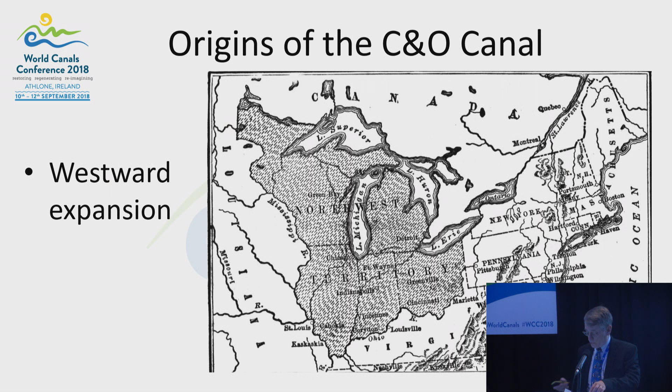Competition between cities didn't start with professional football. Cities along the eastern seaboard—New York, Philadelphia, Baltimore, and Washington—wondered how they could capture the commerce from these newly settled areas. Without connections to the eastern seaboard, commerce would flow from these Northwest territories down the Ohio River and the Mississippi River to New Orleans, or it would flow up the Great Lakes to the St. Lawrence River and Canada.

Philadelphia and Baltimore planned to use railroads to connect to the west. Since this isn't a railway conference, we won't talk much about them for now. But Washington, D.C. decided to use the Potomac River Valley as its route west. The route of the Potomac penetrated fairly deep into the mountains, but much of it wasn't navigable. Hence, the Chesapeake and Ohio Canal was born.

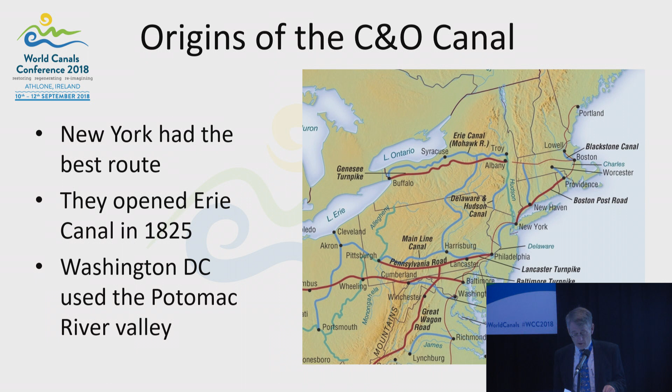On July 4th, 1828, President John Quincy Adams turned the first shovel of dirt for the canal. They planned on building 75 locks, 8 dams, 11 aqueducts, and 1 tunnel en route to Cumberland. Appropriately enough, given the location of our conference today, the majority of the laborers on the canal were Irish immigrants armed with shovels.

When work started on the Paw Paw Tunnel in June 1836, engineers estimated the work would take just 2 years and cost $33,000. Instead, the tunnel took 14 years to complete and cost more than $600,000. The canal finally opened to Cumberland in 1850.

The competing railroad from Baltimore got there 8 years earlier. The canal company was financially exhausted. They never built the last 240 kilometers to Pittsburgh.

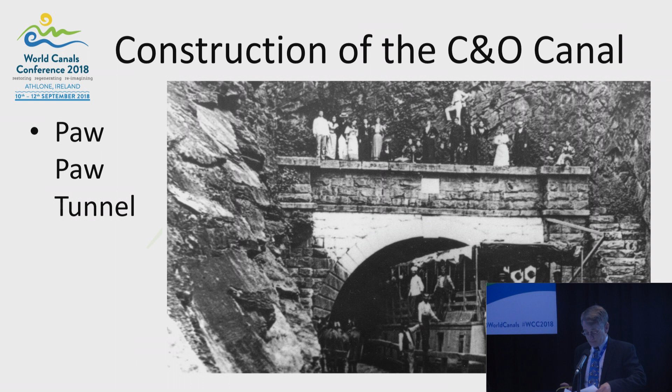The builders of the C&O Canal intended to carry a variety of cargo, just as the Erie Canal did. But they never reached the Ohio River. By 1850, the railroad had proved itself superior in hauling passenger traffic and most freight.

But the discovery of coal fields around Cumberland saved the canal. The canal could compete with the railroad in hauling coal between Cumberland and Washington, D.C. Over 90% of the canal's revenues came from hauling coal. The steamships of the United States Navy were one of the customers for that coal.

That brings us to Williamsport. The two endpoints of the canal, Cumberland and Washington, D.C., were the most important points. But Williamsport was clearly the third most important point.

There's a great valley in the Appalachian Mountains that runs north-south. Williamsport was a crossroads where the canal intersected with that north-south route. South of Williamsport, the valley is known as the Shenandoah Valley, which you may have heard of.

Williamsport was a destination for some of the coal leaving Cumberland, so this town of about 1,500 people had a brisk coal trade because of the canal.

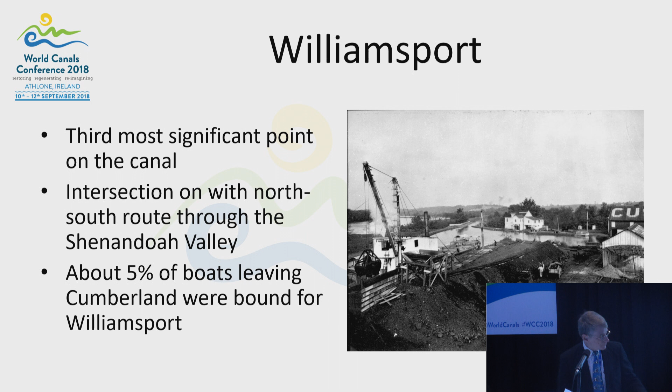Williamsport lies next to the Conococheague Creek. The canal crossed that creek on an aqueduct that was 64 meters long.

The aqueduct is famous for an accident in 1920. A boat, Canal Towage Company number 73, was empty, headed upstream. Captain Frank Myers was the only person on board. The captain's stepson was leading their three mules on the towpath.

When the stern of the boat crossed onto the aqueduct, the upstream wall began to collapse. Captain Myers saw the movement in the wall and realized what was going to happen. He called out to his stepson to release the mules.

The captain jumped from the boat onto the adjacent berm abutment. Then, as the breach developed, the escaping water carried the boat out of the aqueduct into the creek below.

They repaired the aqueduct in 12 days, building a wooden trunk that they used until the canal closed in 1924.

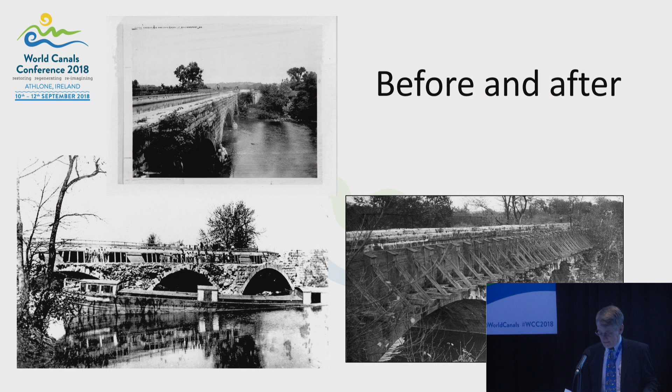Even in 1920, people liked checking out the scene of an accident, as they do today.

The canal always competed with the Baltimore and Ohio Railroad, which ran on the other side of the Potomac River to Cumberland. The canal always suffered from flooding.

Over the life of the canal, 42 significant floods hit the canal. Most floods only damaged small sections.

One devastating flood occurred in May 1889. The flood forced the canal company into bankruptcy. That would have been the end of operations, but the competing Baltimore and Ohio Railroad emerged as the majority bondholder for the canal.

That railroad wanted to avoid a bankruptcy sale that would allow a competing railroad to buy the canal right of way. So they authorized the repairs to be made. Operations didn't resume until 1891, a year and a half later.

Another major flood occurred in March 1924. This one did spell the end of operations. The railroad decided it wasn't worth the investment to make the repairs required. Operations ceased, and the canal fell into disrepair.

So, those of us listening to the news from Washington, D.C. now are worried about what this week's hurricane is going to do to our river next week. They're sandbagging things on the canal today as we talk.

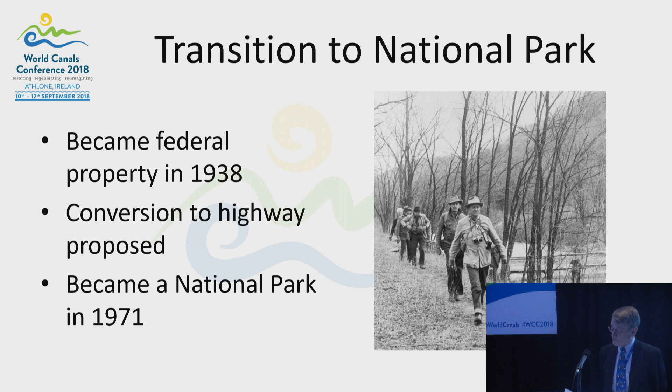Since 1971, the towpath has always been popular with hikers and bikers. Our association has sponsored two-week-long, end-to-end hikes many times in the past. There are 30 campsites along the towpath, each with potable water, a fire ring, a picnic table, and a portable latrine.

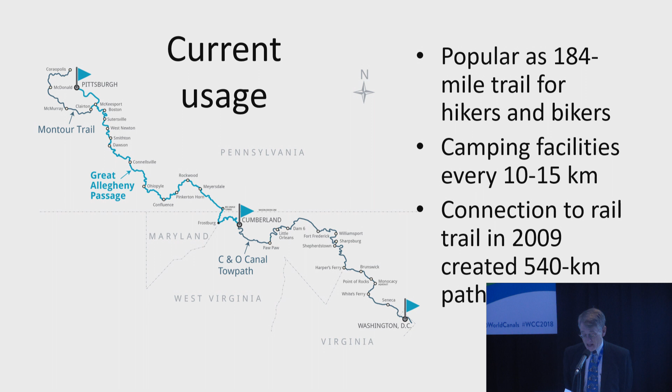Many bicyclists enjoy the challenge of riding 540 kilometers between Pittsburgh and Washington. Businesses and bed and breakfast inns have sprung up to cater to the bikers. Amtrak has installed bike racks on its trains between Washington and Pittsburgh.

Right now, Williamsport is the biggest single site along this canal, with over 400,000 visitors in 2016. Yet there's an opportunity to substantially increase the visitation. Williamsport is still a crossroads. Every day we have 125,000 cars whizzing through the nearby junction of the two interstate highways. You can see that junction in the upper right-hand corner there. Can we persuade even a small fraction of them to stop and visit?

Williamsport offers a dense array of historic structures. If we use them right, we can attract more visitors and educate them about the canal.

So here we have an aerial view of Williamsport highlighting our attractions. The area is about 900 meters long. Working from left to right, we have the aqueduct over the creek there, labeled number 1. We've got a historic warehouse on the basin right next to it, labeled number 6. In front of the warehouse, we have the basin.

A little bit further to the right, we have a railroad lift bridge, labeled as number 2 on the map. Further downstream, at Lock 44, we have an operable lift lock, number 3, and a lock tender's house, number 4. You may wonder what that big black area is south of the canal there. That was a coal-fired power plant. It is closed since this photo was taken.

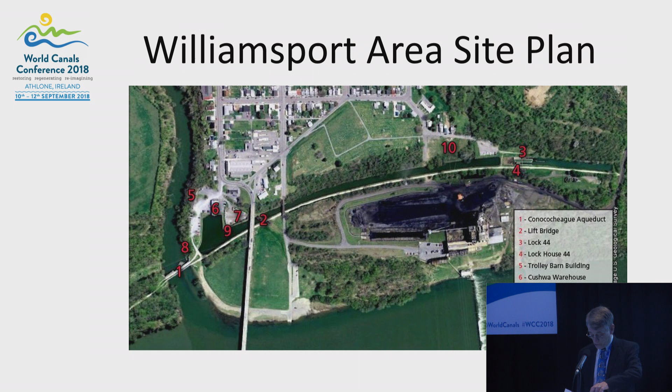Our goal is to create the single most complete canal boat experience in North America. The National Park Service will use the 1920s as what they call their period of significance, meaning they are restoring structures to appear as they did at that time. It will be the only place where visitors can experience firsthand crossing over a rewatered stone aqueduct. They would pass under a railroad lift bridge and then down to a working lift lock.

We will use electric launch boats for the tours. The park acquired a pair of these 10 years ago. There were similar boats during the operational period of the canal, as shown on the right.

We have completed much of the work we need to bring this vision to reality. The lock tender's house at Lock 44 has been rehabilitated. The house is a destination for school groups visiting the canal. They can see antique furniture from the period and interpretive materials.

The trolley barn wasn't a canal structure, but it does date to the era. The building was constructed in 1896 to generate electricity for the local tram system. It burned coal transported via the canal and used water from the nearby creek. We have rehabilitated the interior and use it as a classroom space for visiting school groups, with several hands-on exhibits for the students.

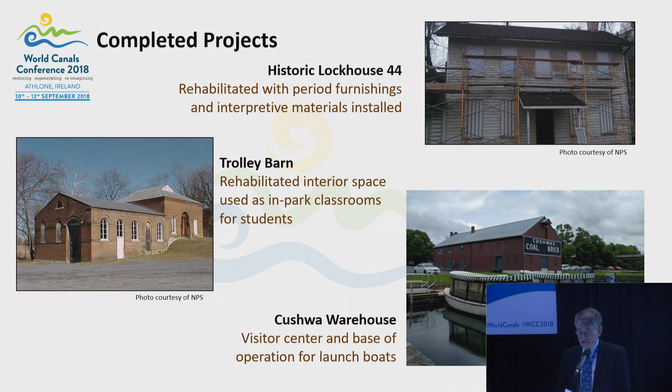The Cushwa warehouse, in the lower right, operated throughout the canal period. The building sits on the edge of the canal basin. The warehouse dealt in coal, brick, flour, iron, and cement. We have rehabilitated it into our visitor center, and we use it as a starting point for the launch boat tours.

As I mentioned, there's a railroad lift bridge that crosses the canal. We had to raise the bridge and lock it in position to allow boats to travel from the warehouse and the aqueduct down to Lock 44. We're lucky to have that lift bridge. It was built only one year before the canal stopped operating. Fortunately, 90 years later, it's still there.

Because we plan to operate the lift lock at the downstream end of the area, we had to construct a new water intake system to ensure that we have enough water in the basin to operate the boats. We restored Lock 44 to operating condition. We plan to take launch boats down through the lock as the downstream turnaround point for the visitor's journey.

Of course, the centerpiece of our effort is the aqueduct restoration. The project will repair the foundations and arches, rebuild the missing spandrel walls, and replace the parapet wall. It's scheduled for completion in spring 2019.

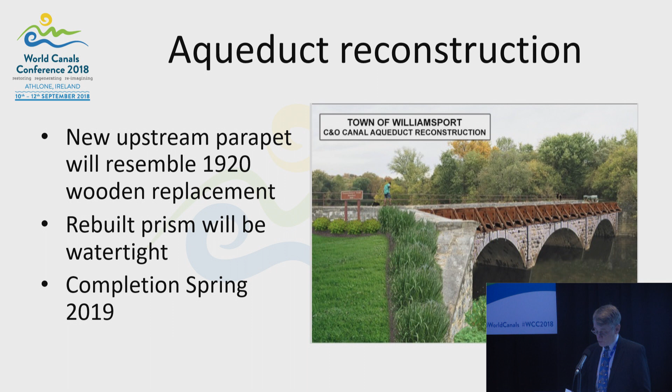We will water the aqueduct. There will be a small basin at the upstream end to allow the launch boats to turn around. Here you can see an upstream view from June earlier this year.

You can see the cofferdams they built for the aqueduct work. The project will place a structural floor within the aqueduct, and the entire structure will be repointed with cracked stones repaired.

Here's another view looking downstream. Divers retrieved some of the original stones that fell in the creek in the 1920 accident. They will use what they can in the effort.

Because the restoration is replicating the post-accident appearance, the park will end up with more stones than it can use. What they'll do is bury the extra stone on site, just in case there's a future effort to build the original stone wall on the aqueduct.

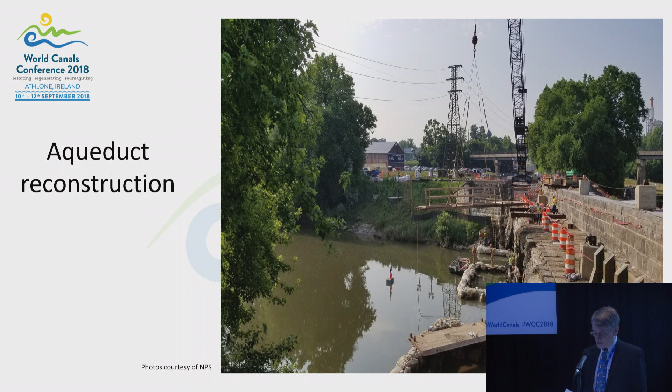The park has an award-winning education program. For several years now, all fourth grade classes in the surrounding county have been visiting the Canal Basin as part of their normal curriculum, and our association has helped fund these visits.

The park makes materials available to classroom teachers in preparation for the visit, and has recruited a Canal classroom corps consisting mostly of retired teachers, who assist with the visits. The visits are multifaceted - I'll quote from the park's materials that they provide to teachers.

As a result of visiting the Canal Basin, students should be able to: one, define the purpose and importance of national parks; two, describe the C&O Canal as an early transportation system.

Three, explain the concepts and effects of various earth processes, including weathering, erosion, and flooding. Four, examine plants and wildlife using binoculars.

These school trips help promote overall visitation. We find that if students have an enjoyable time, they return with their families on the weekend, showing mom and dad what they've seen.

These restoration projects took years to accomplish. The National Park Service money came from the National Recreation Fee Program.

The two Maryland programs used were a Transportation Alternatives Grant Program and a Maryland Bikeways Grant. Local support from the county and the town were critical in obtaining the funding.

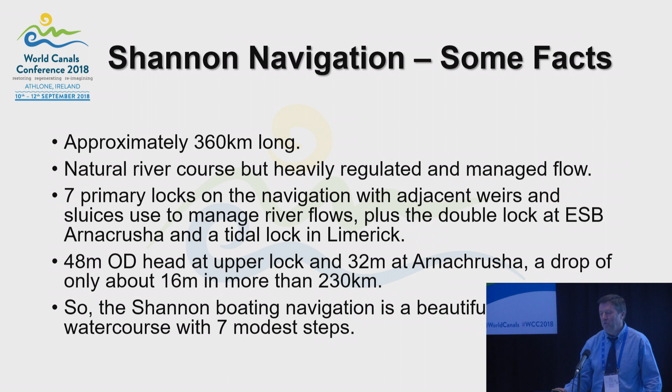The boat use on it at the moment is approximately 45,000 lock passages per year, predominantly in the April to October season.

Albert Lock in the north is the most heavily used lock, with approximately 8,000 passages per annum. But the rest of the locks are reasonably similarly and equally used, with about 5,000 passages per year. The split of boat users is approximately 50% private and 50% rental.

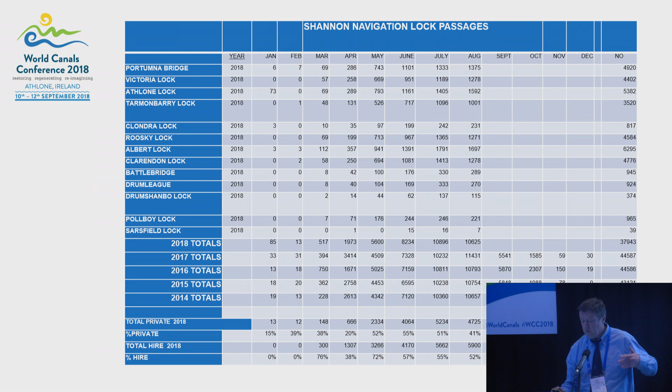We take a regular record, and we determine at every lock we're measuring and recording which are rental and which are private. In fact, it also shows that the annual usage has stayed fairly stable for the last 3 or 4 years.

So what are the issues on our lock maintenance that have arisen? Basically, we have a mixture of the traditional full timber gates, and then we have some that have been replaced with a steel core, timber post and heel. They're all operated by a hydraulic ram system, which replaced a winch and chain system a little over 20 years ago.

One of the impacts of this is that it introduces a significantly higher load on the gate, and we found that is one of the reasons why the gates are deteriorating. It's pulling the timber joints apart. So we have 200-year-old lock chambers with lock gates that are 50 to 70 years old, and a number of them are causing us more and more problems.

We were having problems where only one gate would work, for example, in Tarmonbarry 4 or 5 years ago, and then in Victoria, which is a lock below us, it has a wheel and rail support system on the base of the lock, and the wheel had fallen off the rail, so one of the gates failed about 6-7 years ago.

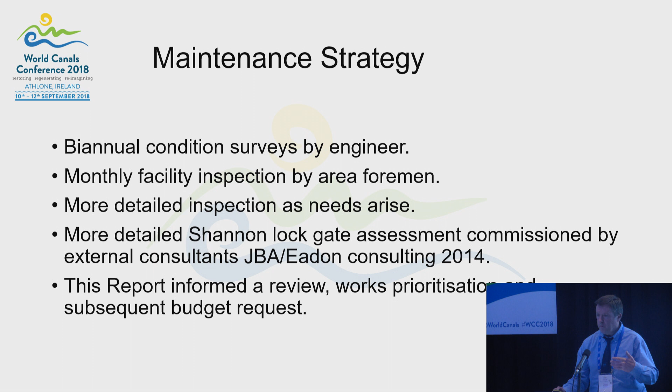In 2014, we commissioned a more detailed independent assessment of our lock gates, really to support our own assessment and aspiration that we needed more money allocated for essential maintenance works. So we appointed Jeremy Benn Associates and Eadon Consulting to look at all the locks along the river. That report was submitted in 2014, and it supported our own view and informed our actions going forward, allowing us to support our own prioritisation and make a budget request submission.

That process fundamentally prioritised five of the locks for work. The priority was viewed to be Tarmonbarry, because the gates were leaking badly. There were problems with the land tie collars, and the gates were nearing the end of their effective working life. This was followed by Rooskey, Victoria, Athlone and Albert.

So priority number one, Tarmonbarry, was addressed in 2014. We did this due to limitations of our own resources, and decided to go out to contract to replace the 4 lock gates and also do repairs to the lock chamber and replace the land tie collars. The contract for that was awarded to L&M Keating, a Clare-based contractor.

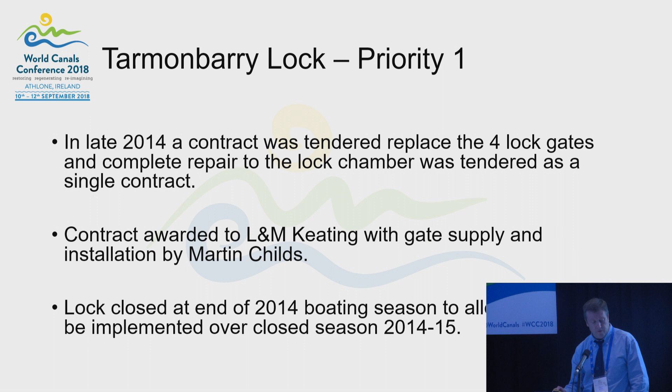They went to British specialist Martin Childs for the lock gate provision. That lock closed in the 2014 season to allow works to be implemented over the closed season of 2014-2015. The primary works were masonry repairs, where we needed to relay some of the coping stones, grout sections of the sill that were leaking, and replace the 4 lock gates.

The land tie collars were also replaced, and in that project, Eadon gave us design input, and we replaced the traditional land tie collars with a fairly heavily engineered steel land tie collar. We also replaced the existing cast iron land tunnels with stainless steel, and did other miscellaneous works.

I'm not going to give you much more on Tarmonbarry, because I'm going to move on to the next 2 that we've done more recently. But some of what we did at the end of that, it wasn't a totally satisfactory experience for us.

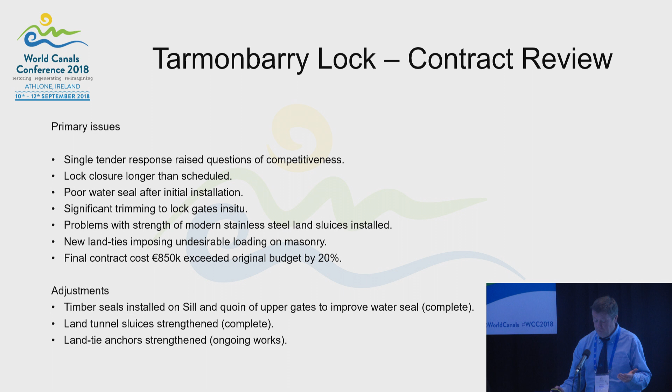We found that there were problems with the gate installation, and that the seals were poor on the gates once they were installed. We had issues about the land tie collars, and we still have some of those issues. In fact, the gates were so poorly sealed that we had to introduce a timber seal along the sill and up the quoin to mitigate against the leakage that happened after immediate installation.

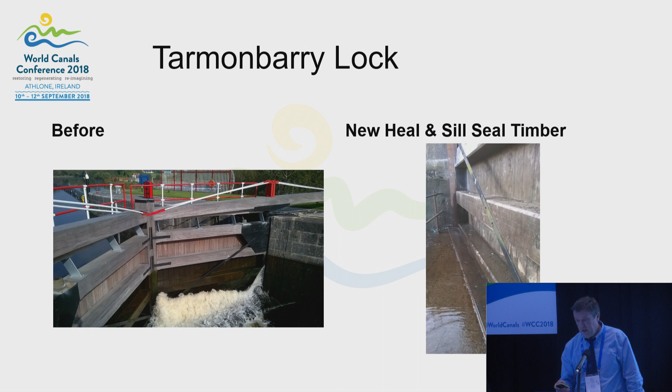So then we moved on to the more recent works on Rooskey and Victoria locks. And that Tarmonbarry experience resulted in decisions being taken on how we would proceed with that installation. So rather than going out to a contractor, in the Tarmonbarry experience, we got one valid tender when we went out to tender.

We reviewed our own capacity, and we made the argument that, in fact, we would be better off trying to implement the project with our own in-house resources. Although the specialist gates, the large gates, we don't have the capacity to make. So we commissioned gate manufacture and supply by others, but with the intention that we would install the gates and refurbish the locks.

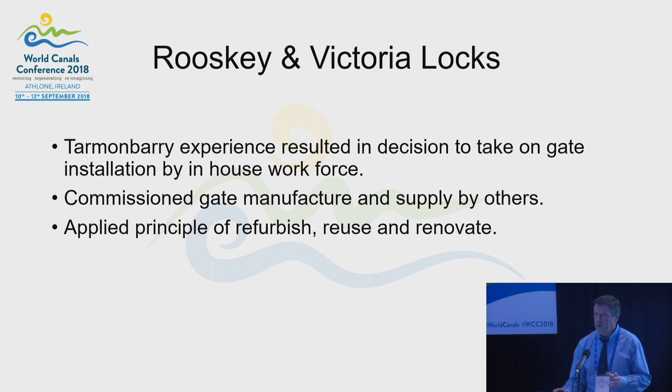Wherever possible, the experience of the land tie collars and the experience of the sluices, we applied for both Rooskey and Victoria the principle that we would refurbish and reuse and renovate anything that we could within the existing facility. The schedule of works was to install a cofferdam and dewater the chambers at the end of the boating season, which for us is fundamentally the end of October. So we closed both locks in November of 2016.

We inspected them ourselves, and we facilitated surveys by the gate manufacturers. Because one of the issues on Tarmonbarry was that clearly the gates that were provided were actually too big, and there was a lot of trimming to them. That was at least in part because they measured them when the chamber was wet. So in both Rooskey and Victoria, we facilitated a dry dock, a dry lock inspection and measurement.

And so the contract for the supply was won by Wijma Kampen, who are a very competent Dutch organisation, and they came over and surveyed in the autumn of 2016. They started manufacturing the gates in 2017.

The Rooskey installation was then taken over by our North Shannon operations team, and the Victoria installation by our South Shannon operations team.

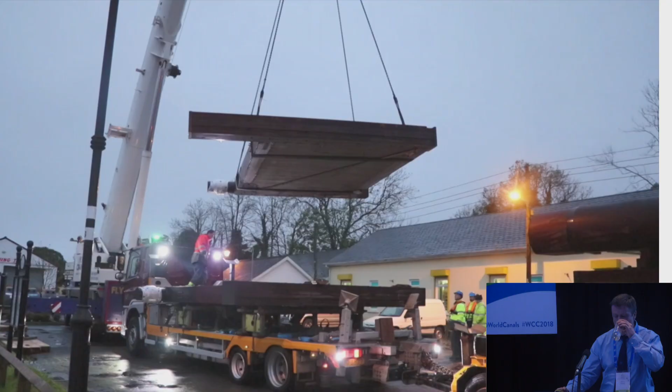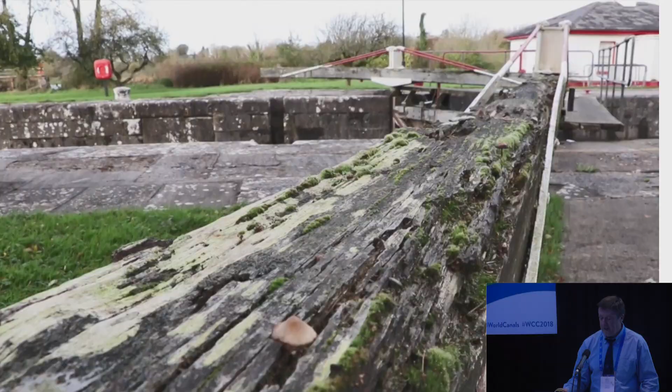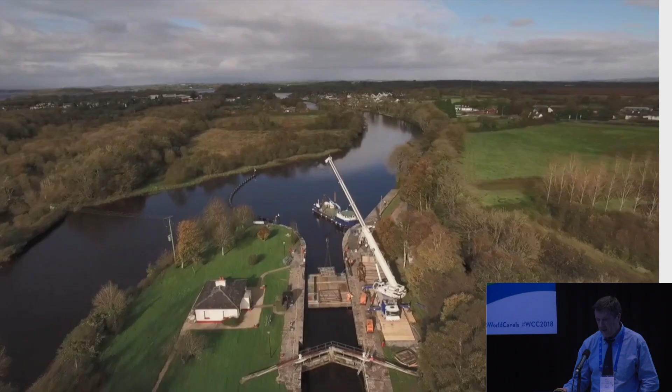So this shows the old lock chamber. Divers being mobilised, commercial divers, to support us in the installation of the cofferdams. There's Inishmullen, who is the sister boat to the Kailinoig, which is outside of the building.

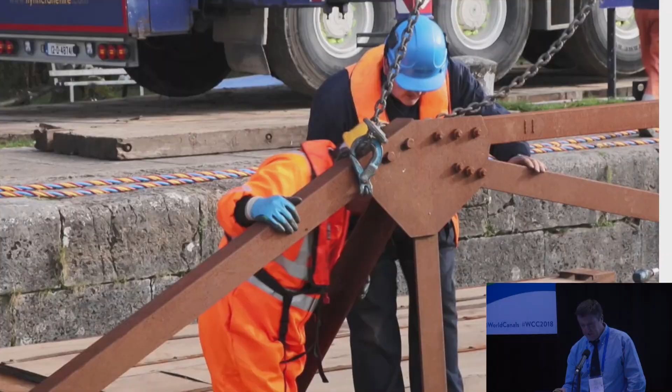So here, this is showing us installing our cofferdams, which have to be - the divers are basically required to wedge the cofferdam against the slot - and then good old peat is used to seal the leaks.

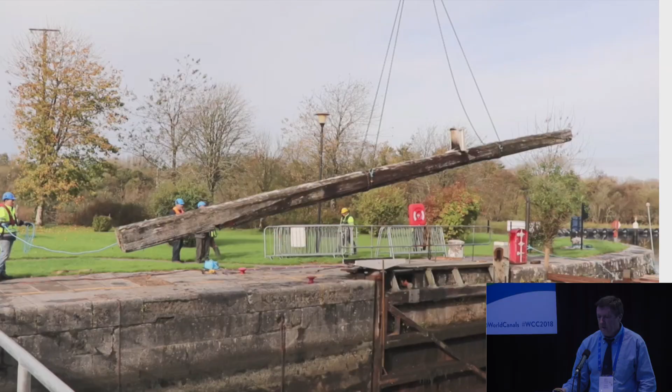So we then stripped back all we could off of the existing gates, all the metalwork, for potential reuse. That was stripped down and sent away for sandblasting, some repairs, and then painting.

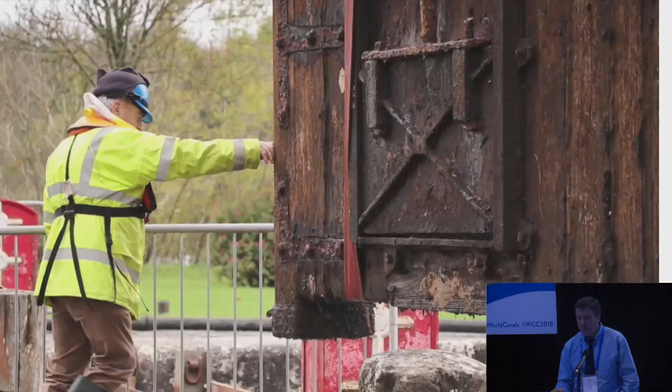Each time we dewater the lock, we have to electrofish to protect the fish. So we reused 3 of the land tie collars. We reused the land tunnel sluices, but not the gate sluices. The gate sluices were considered to be past refurbishment.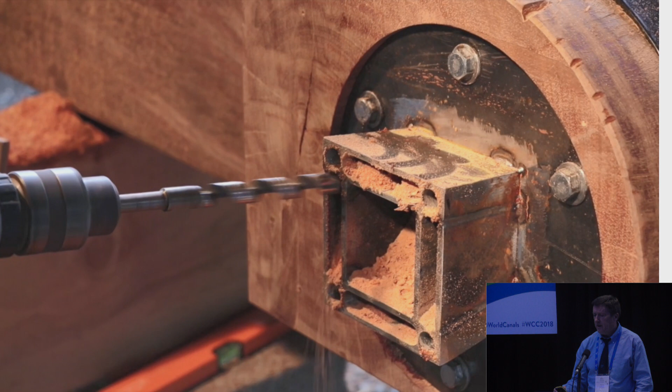And then we completed some work on the lock chamber. We rebored the pots because there was wear in them, and the new gates got new stainless steel pintles installed in them. And you see on this one it has a steel collar over the heel post, and that's to help distribute the load of the hydraulic ram.

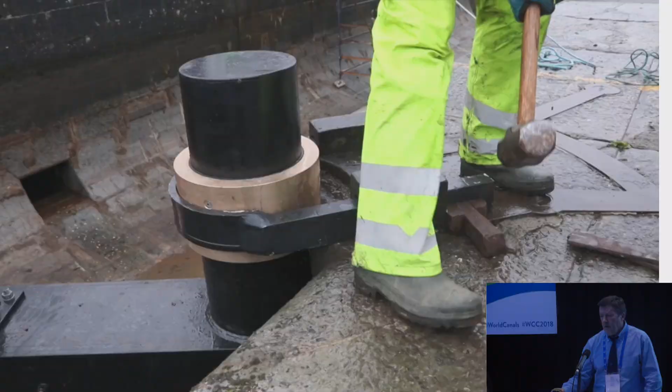Wijma Kampen then came up with some innovative suggestions on how they install and build lock gates in the Netherlands, and I think the two lads that came over did about 45 in a year or something. One of the elements was a mitre piece that is bolted to the mitre post, and that then facilitates the trimming.

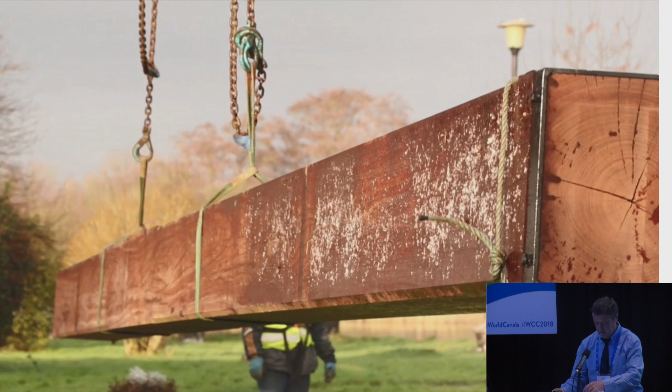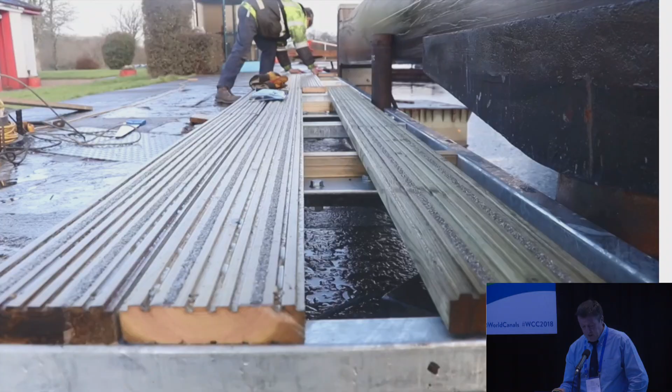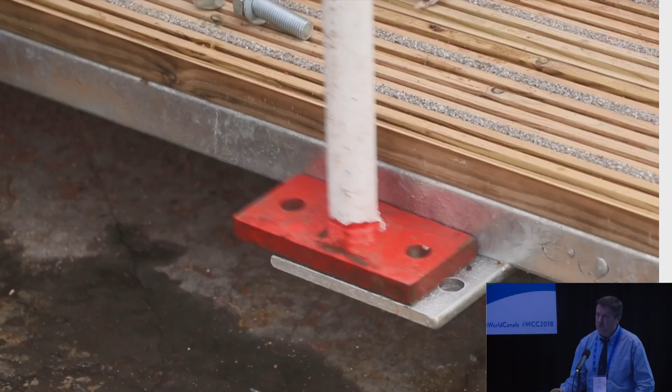Credit for all of this, all the people you're seeing in the video are from our North Shannon operations team, and then our site engineer Annette Nally looked after it, and the senior engineer Eamon McMorrow oversaw it. Annette obviously got such a kick out of it, she's taken a career break to celebrate, and in fact Eamon McMorrow's retiring on the back of it.

Okay, so I think we'll let this run to the end, which is very nearly here, as one of the first boats is seen to arrive in the newly refurbished Rooskey lock.

So moving south into the real jewel in the crown, the South Shannon, we have Victoria lock gates. So these are the lock gates in 2015.

These gates, you can't see it here, but you'll see it later - these gates have a wheel and rail support, which takes approximately 30% of the load. They have no balance beam, and we were having serious problems with the lower gates. They're about 6.5 meters vertically and in the curved profile horizontally.

So the primary works elements in Victoria was to replace the lower gates, to replace or refurbish the wheel and the rail, the pot and the pintle, and the sill, which was also damaged by the damage in the wheel. And also to upgrade the hydraulic opening system.

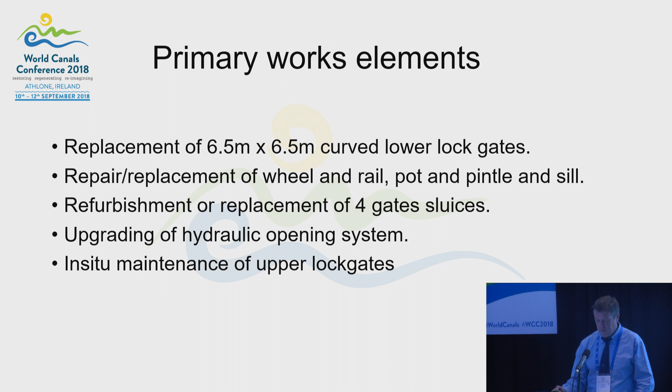So this work was undertaken by our South Shannon operations staff, supported by a few specialist contractors. Michael McKeon, a technician who many of you probably know, oversaw a lot of the work. The lads on the Kylan Oak boat outside would have done a lot of the on-water boat and towing. So we'll now take you through some of the specific challenges of the Victoria location, if you don't know it.

It's quite an isolated location, accessible only by small rural road. It has a 2.5 meter wide bridge with a 30-ton weight restriction on it, and it can only be accessed from one side. We had to work out how we were going to be able to lift 20-ton gates out and 20-ton gates in to this location. The size of the curved timber profile was also a challenge for us, because it's the only ones we've been working on for a long time.

So these photos take you through some of the steps of the works in Victoria. We moved from, obviously, the lock gates in 2015, and looked at a number of craneage options. We looked at building a gantry crane on site, and we looked at building a crane in part on site.

But we had all these restrictions of getting the equipment in, and in the end we reverted to a crawler crane on our pontoon platform. We had to load this on south of Portumna, and then the Inis Cealtra outside - or the Innish Mullin, I think it was actually - towed the crane up in about 2-3 hours up the river to Victoria.

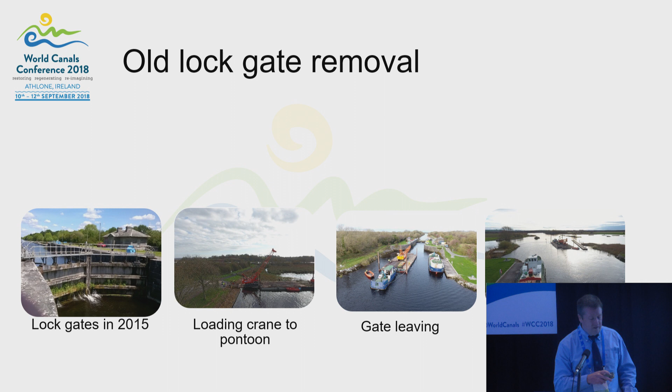So this is the old gate going out, the working platform in Victoria Lock, and then the gates as viewed in Munster Harbour on the way down.

The new gates came in, as I mentioned earlier, in a disassembled form, because we couldn't get that load on the Irish roads. So they arrived in Munster Harbour, where we have a base, and then our lads with some 2 or 3 operatives from Wijma Kampen assembled them in 3 days. That was the main timber gates.

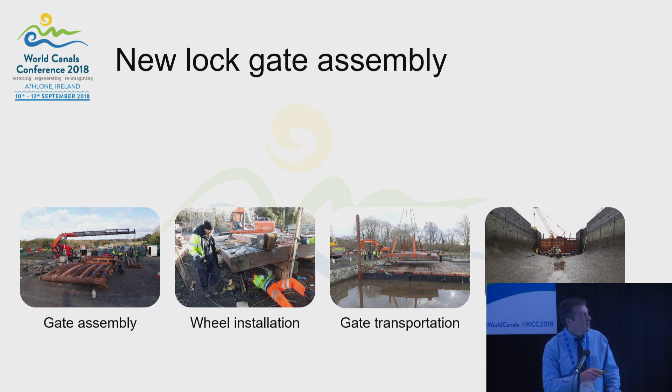We then had to start putting on the auxiliary elements, like the wheel, which was refurbished, and the sluices. We then loaded a gate on, and then it was taken up to Victoria Lock.

At Victoria Lock, we had to get specialist contractors in to plane the cast iron rail in situ, and to rebore the pots which received the pintle. The photo on the left shows the contractors working on that.

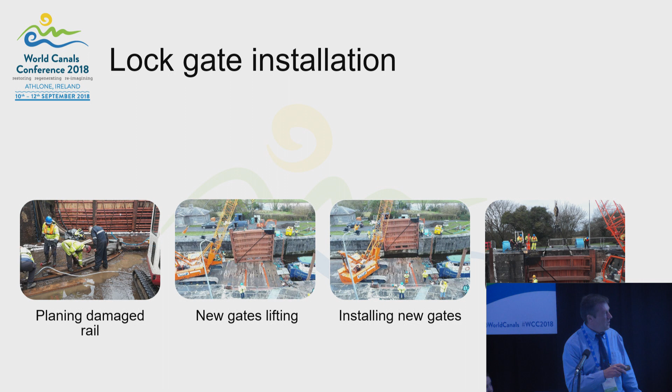And then we lifted in the gates with the same crane. We had to do them one at a time, because of the loading restrictions on the barge. So we put one in, then we went and got the other one. The fourth photo shows the gate in.

Photo of the dewatered lock - it's a pleasure, it's a beautiful lock. The quality of the work is just astounding, and the verticality is a thing to behold.

In our case, we took a month longer. We got it open in March of 2018.

So some of the elements that we learned a number of things from this whole process. One of it was that you can restore sometimes more than you think you can, and so the sluices were stripped back, they were taken away. We got new brass plates, refurbished all the metalwork, and they are reinstated on the gates as was. So how old the sluices are we're not sure, but the other gates were 70 years old, so the same sluices are on the new gates with some improvements to the hydraulics.

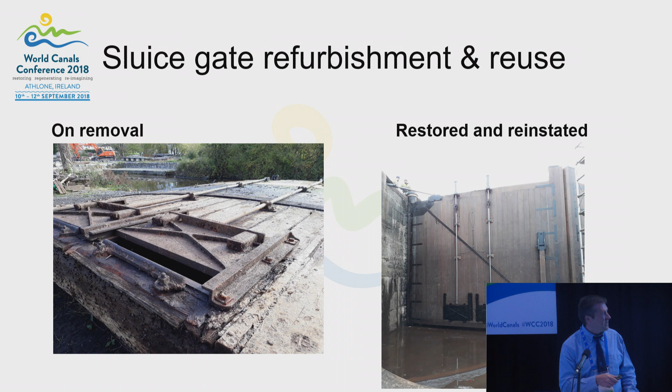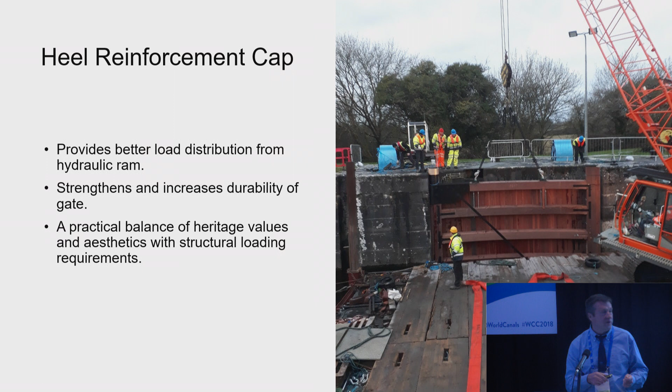Just wrapping up, the two other elements. The old pintle was replaced with a new pintle, and the reinforcement cap on the heel is there to distribute the load, as mentioned previously. That's a picture of the bolted mitre piece.

I'm to wrap up, so I will move to the lessons that we've learned from this. The lessons that we've learned, I think, are that there's limited commercial expertise in the heritage lock sector. Waterways Ireland has quite a skilled workforce, and we need to recognise and value that.

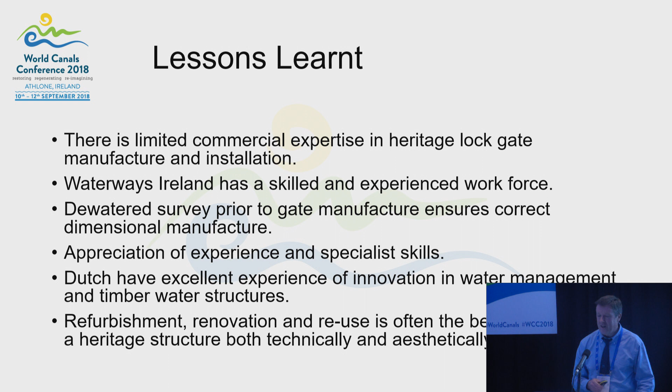There's plenty to be learned from other people's experience, and the final conclusion that I have is that after some years of neglect, the lock gates on the Shannon are progressing. We've learned from our forefathers, we've learned from our experience, we've learned from each other, and the retention and legacy of skills is essential if Waterways Ireland are going to continue to have the capacity to deliver in the future. Thank you, and if you have any questions, my colleagues in the audience will answer.

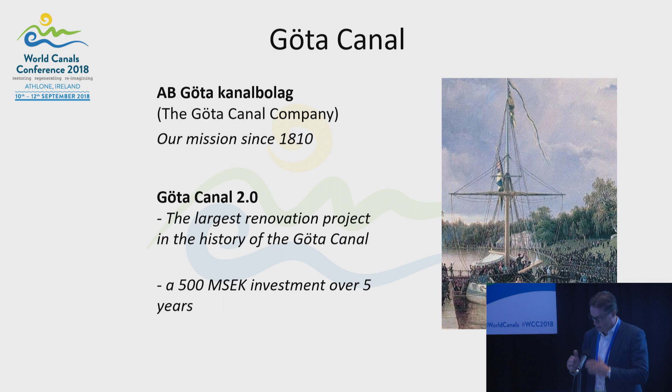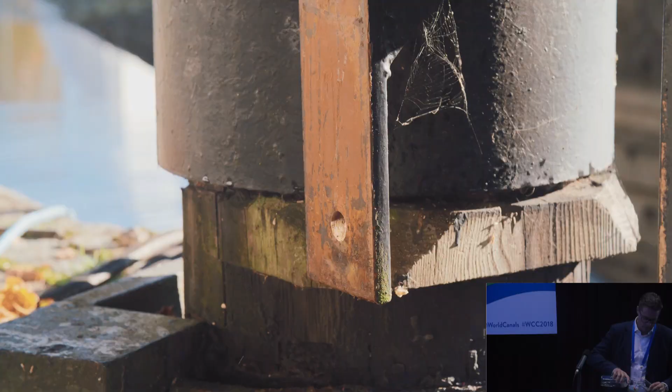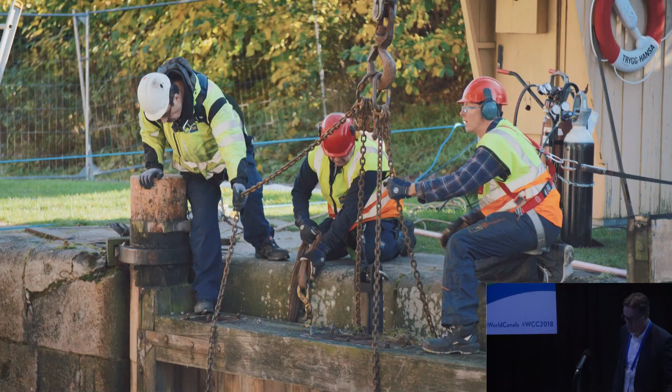So here's a little bit of what we're doing during the winter. You see our headquarters, the yellow house behind us.

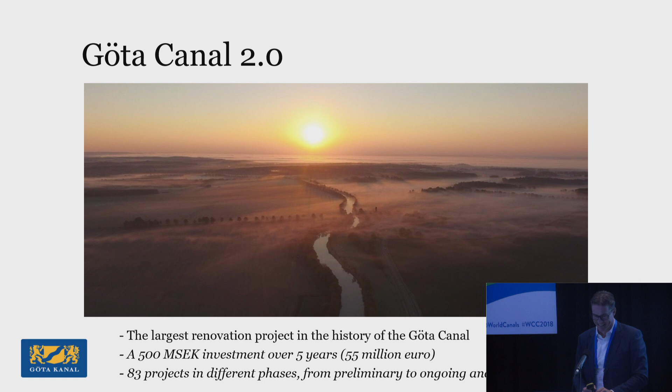So we do a heavy lot of work. My colleagues down here say it's a new canal. It almost is. I will go through it a little bit.

The goal of doing this is to have the canal operating safely. That's the main target of this project. But also, when I joined the company, the backlog on maintenance was heavy.

It's also about having control over what we need to do today, tomorrow, or the day after that—every screw or small thing—so we have control over the needs. So when we go home, we don't leave a big backlog for the next generation. That was also one of the things.

So now we have invented the whole system. Everything we have is in a data system, so we know exactly what we need to do each day, each year, each 10 years, each 20 years, whatever. So we know the needs in terms of people or money.

The third thing is also that we have a new dam law. The regulation is increasing, and we need to do more things. We need to shape up some things, change some ways of working so we can follow that, because it's under that law, and it has been a bit here and there. So we need to step up on the safety side as well.

And the other reason is Göta Canal itself. This is a very famous brand—everybody knows what it is, almost, in Sweden—and we cannot have an accident, and we don't want to have an accident. People getting hurt. It needs to be safe.

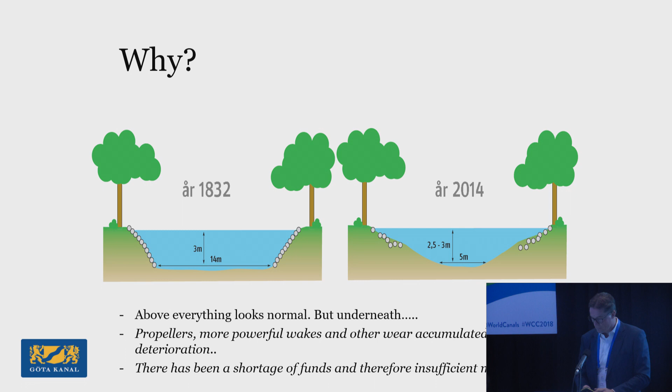And then we said to the owner, now we need to do something, otherwise we need to close down part of the Göta Canal. And it's your choice to do it or not. So they told us, okay, you need to do two investigations - one, what is the cost to close it down, the other, okay, what do you need to have it up and running again?

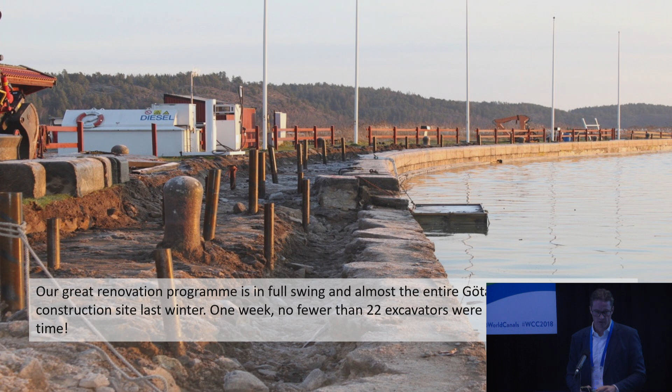And we did that, and of course they go for having it up and running, and we say we need roughly 55 million euro. It's a lot of money, but that's to actually take away the backlog of the maintenance parts, no more, no less. Come up to get some breath when you're diving - that's the situation.

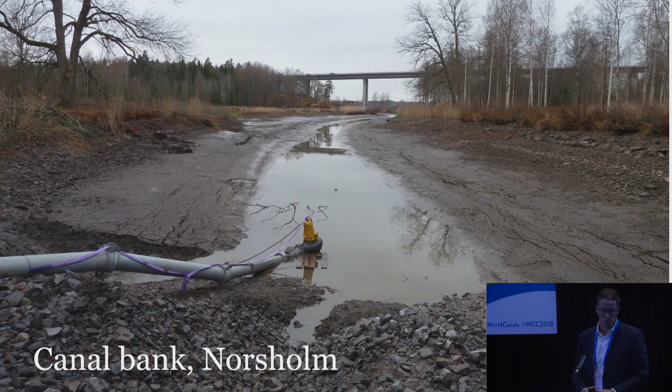So the big boats, the passenger boats, cannot go there. They're going at roughly a 1 meter line that they can use. So here we stopped, and also it's 500 meters, and the construction is that we're putting these trees into the canal bank to have it stabilized.

It's a big tree alley, a whole system. From the beginning there were approximately 16,000 trees. Some of them have gotten old, some have collapsed in storms, some have had illness, so now we roughly have 10,000 trees. So our owner also says you should come back slowly on that. So when we do this renovation, we put new trees where it's empty - we do it the whole way. So with normal maintenance on this place, we will probably be able to use this for 100, 150 years, something like that.

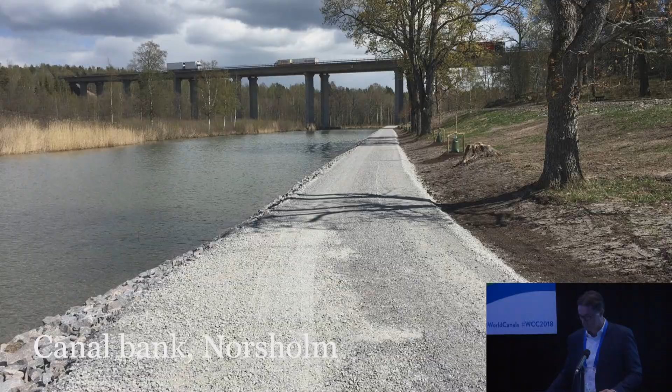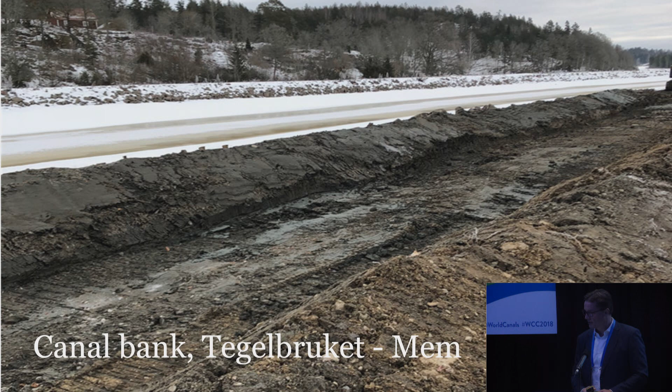So here we are actually doing a new system. We take away the canal bank. When you see this, you start to be a little bit scared, but here we do it. And we are changing to new material. You see in the middle, this is the profile. We are changing to lighter weight.

It's actually a foam glass that we are putting in there, taking away the old material which is very heavy. Because when it's heavy and sinking, we put in new material on top, it gets even heavier and sinks even faster. This has been continuous for many years. Now we say we cannot do that anymore, so now we have done this.

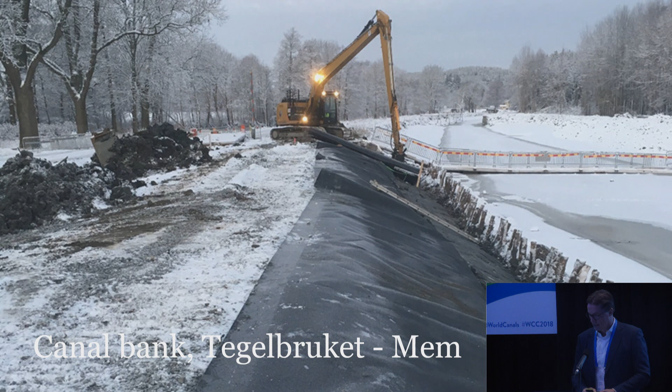Also the sealing side is on the right-hand side, we have a new system for it. So here we put in the material, here we have the clay. We use that, of course, and then we have a rubber matting on top of that. This is used in harbors, airports and so on, so it's really strong, you can stretch it very hard. And here you see the system. I will not go into the details, only an overview.

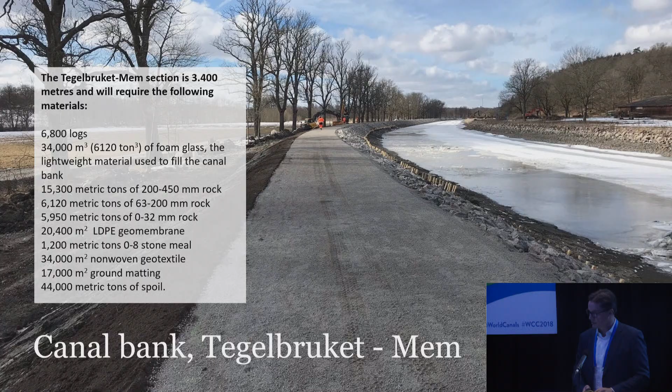And here it's done. So one third of this distance is done this winter. We will do the rest this coming winter. And here also, again, we are running behind.

We should start to do some inspection on this quay in Sjötorp. So we lowered the water slowly, very, very slowly, 2 years ago. And then this breakdown came. The guy said, you need to do something, I need some love now. So instead of just doing the inspection, we actually needed to create a new way to do this.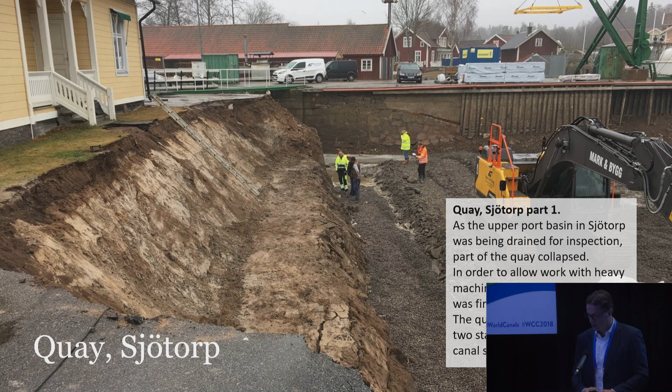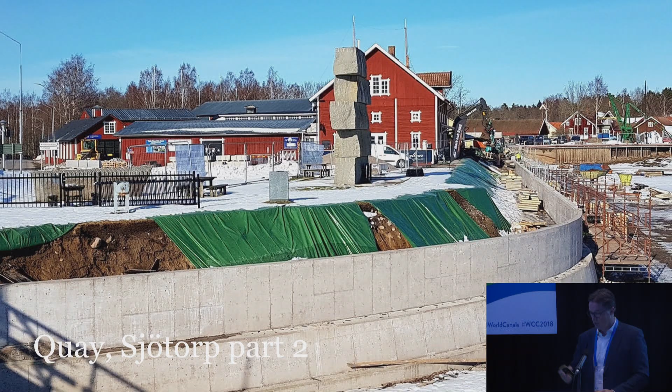So here we have this before, a year ago, before the start of the season. So we have this new quay, and then we see the rest of it we have done this winter. Of course, when you're doing this kind of work, something always pops up that you don't know, even here. So we always have something to rework. But here's the material that we have used for this 155 meters of quay, and hopefully this will last 100, 150 years before we need to do it again.

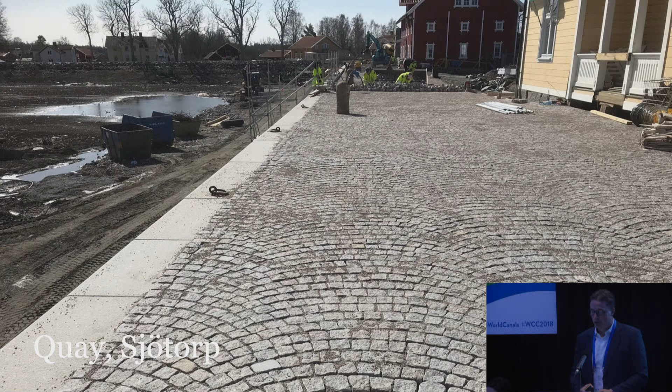We were almost there, but not this time. And also here, for security reasons, we need to block this area, and we have an entrepreneur who has her business there over the summer. So we said, okay, we need to remove the house when we do the job. We will do this winter, so we do it before the season. So actually we moved the house.

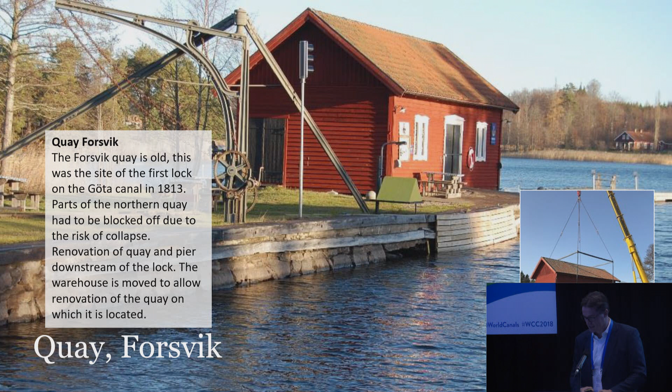You see it on the right-hand side there, we moved the house actually, and it worked very well. So they opened this summer also and had good business. So that's good, but it looked very bad underneath.

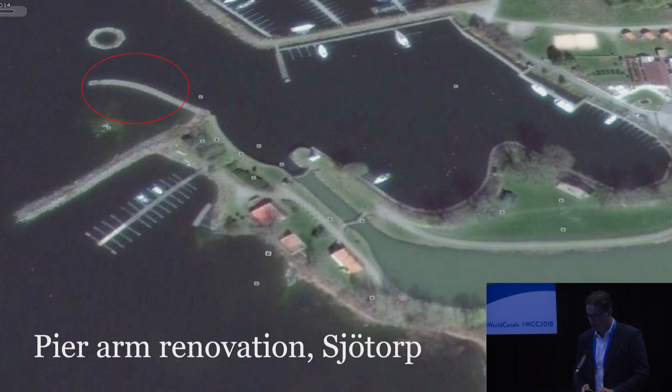And we do some repairs. I have a few minutes still, so I will go through quickly. These have also collapsed out in Vänern, a big lake. But here we're putting together the old stuff so it really looks like it did from the beginning. But inside we're using the new way of working to really make it strong.

Yeah, we're doing a lot, mixing new technology with the old one. And also here we have a fairway wall, I will go through it. You see it here, here is dangerous. It's not a safe place when it's windy, with a lot of waves, or cloudy.

So here we are starting this summer actually to do a new way, a lot of thinking about how to do it. But also these guys were working over the season, and we think it's very good that they are doing it, because then our guests can see that we are doing things. Normally they don't see it because it's underwater.

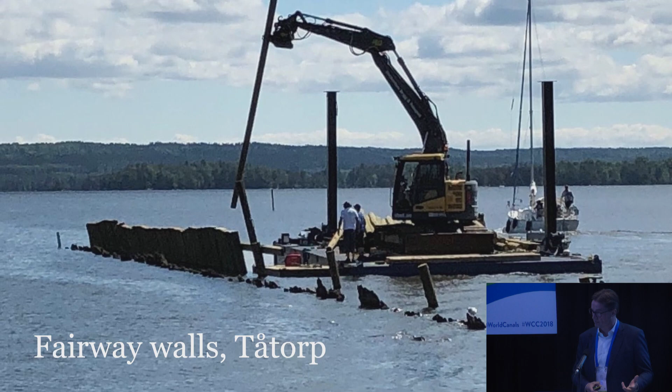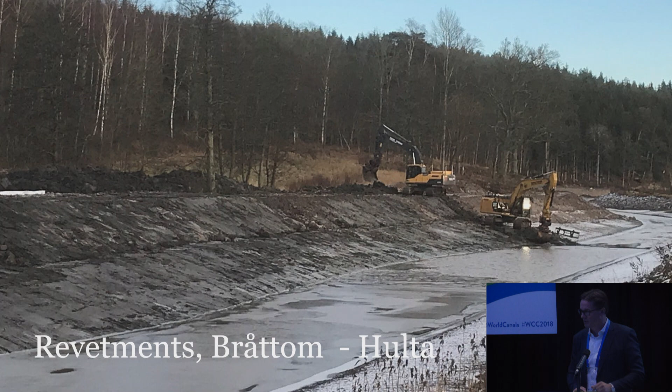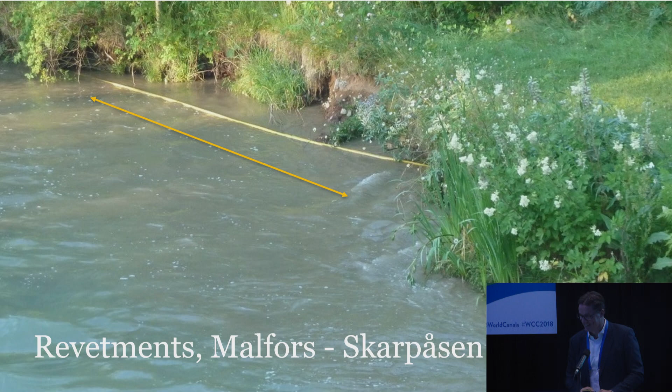Here we have another part. You see two yellow lines. The lightest of them is the community's fiber net, so it's popping up here. But here it's the same - we're doing the profile from the beginning, putting back the stone and the tree the correct way. This is going through a big city, so a lot of people have been watching. We've gotten a lot of questions, but a lot of very positive feedback. So it's really nice.

Now we'll stop because my time is out. There's more, we have a lot to do, but we're catching up, so we hope this winter we'll take the decision on what we'll do, not let the canal give us the signal on what we should do.